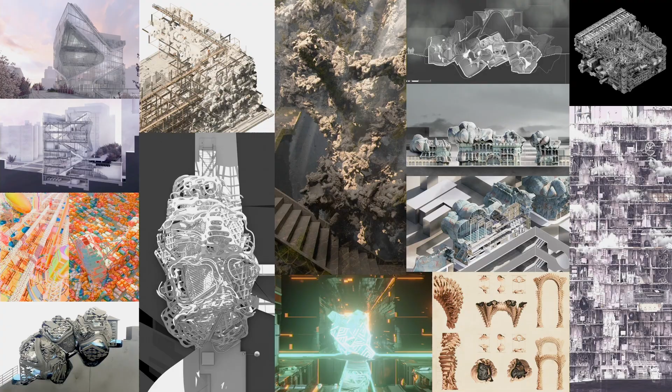We have always also worked in academia in parallel to practice, almost since day one, since we started working. We've done master's and bachelor programs at universities in the US and Europe.

In our own practice, which is maybe what we are going to expand on in the beginning of this lecture, we've been working since 2010 as architects and consultants, mostly on large-scale condos, malls, urban planning, property developments, and management of land, as well as a few occasional interiors. Beyond designing, much of this work is managing projects—you never really know where you'll end up in architecture, so to speak.

So let's return to bigness, and afterwards Hseng will take the second half to expand on craft and smallness.

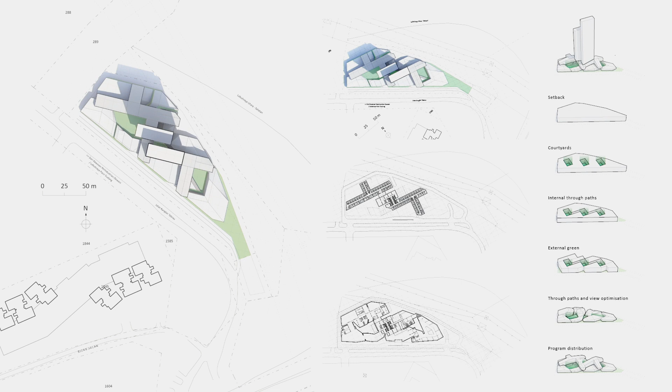Not knowing much about the neighboring projects to come, we based our first ideas on the local street fronts rather than the towers themselves.

So we wanted to propose a sort of city in a city, where the podium is deployed as an urban intensifier, incubating a culture of congestion where different functions and activities intersect and overlap.

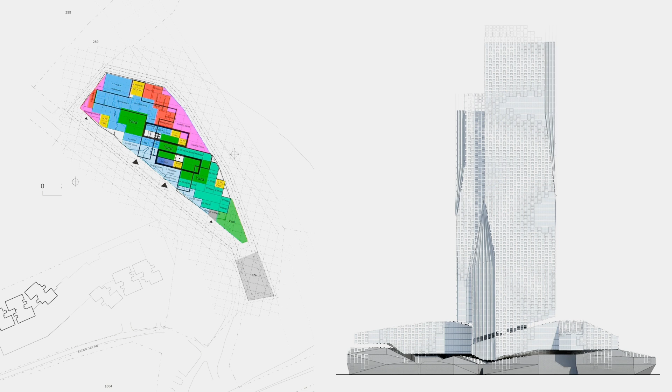It's a big and complex project, a total build-up of almost 90,000 square meters. It comprised over 400 hotel rooms, 400 residential units, almost 200 office units, 300 mall lots, plus community spaces and so on.

The ground and lower volume are mainly public, with commercial lots and restaurants, hotel functions, and apartment lobby, as well as back of house and centralized hotel kitchen and things like that.

The second tier volumes up are split between commercial, hotel, and residential, containing office spaces, hotel function rooms, apartment common spaces, gym, housekeeping, and things like that.

And the third volumes up are towers. The northernmost volume is mainly hotels, and the southern volume is apartment units.

The design volumetrically was made to offer views and spatial experiences locally and within, as an addition to the cityscape. The project was intended to play as sort of boulders, a play on this idea of erosion and spatial experience emulating geology and vastness, while smaller gaps, like cracks against the street, would function as local smaller experiences creating a more intense environment.

It was important that the project would appear as clusters of smaller scale massings, almost reading as separate volumes, to form streetscape, shops, restaurants, and cafes, literally creating a street front.

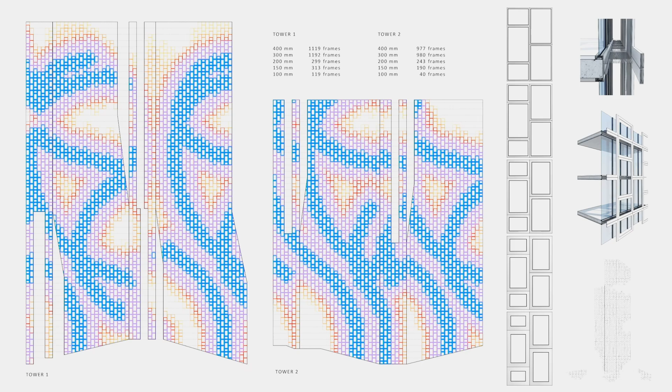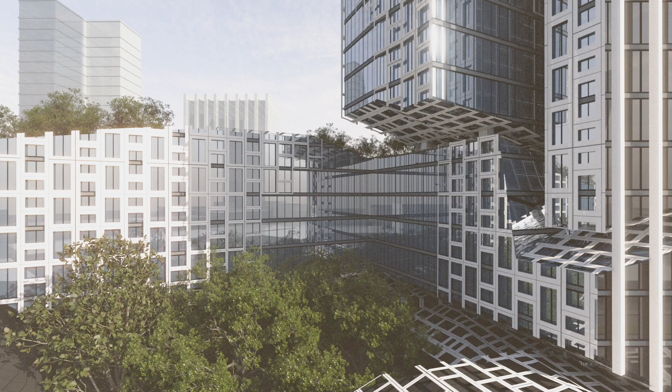The project was designed to offer access to the community and around the city, and it was intended to become a node that connected neighboring sites, a beacon in the area, a place to go and socialize for citizens and tenants. Much of the project was spent negotiating regulations, zoning, meeting program requirements, and a kind of fight with our own preferences and agendas for this particular project.

At the time, we were beginning to see changes in the market, and COVID hit. Families were looking for better and larger homes, and that became the agenda of pretty much every project overnight. This allowed us to focus more on livability and community rather than asset-driven developments, to our preference.

This is located west, just up the street from the previous project, up the hill overlooking the city. While it also is a very large project, about 60,000 square meters, it is slightly smaller than the previous one and more private in relation to the urban fabric.

The program here is much more reduced. Instead of overlapping and intersecting the different functions and activities within the building, here it was more important to emphasize domesticity and privacy. We also needed to propose kindergartens, clinics, shops for basic goods, and plenty of social tenants embedded in the typical commercial lots.

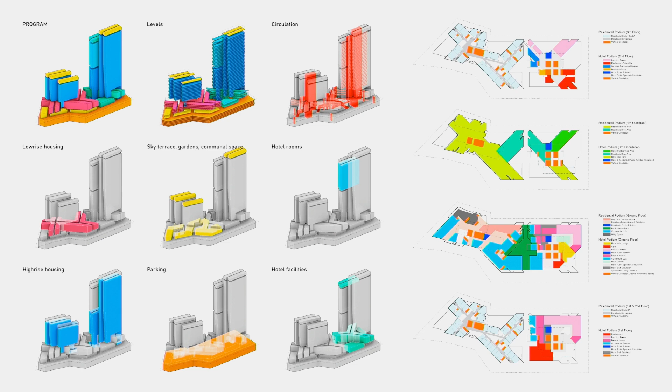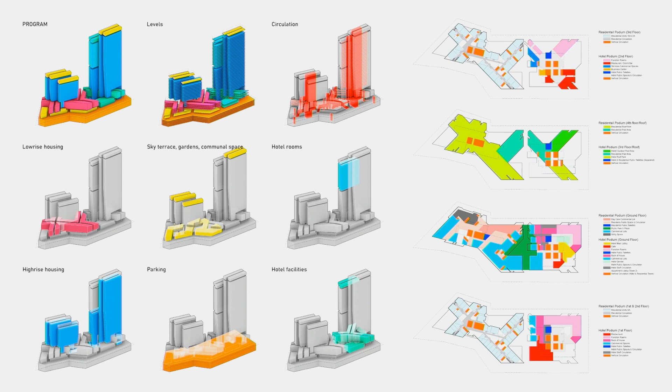So the project suddenly got more intertwined with society and needs. Our response was to completely separate the program from the apartments and the auxiliary programs. So although both private and semi-public programs seem to interlock volumetrically within the building, they are very much autonomous, with separate amenities, separate circulation, separate entrances, separate everything pretty much.

And the facade is composed of a double envelope: one outer wall with balconies and movable shaders to mitigate sun exposure to the apartments, and an inner glass wall allowing panoramic views across the city towards Singapore. This double envelope creates kind of an interstitial space between inside and outside.

Large all-around balconies with planters and space for plants. These interstitial spaces function both as gardens, we hoped, and as an outdoor interface, a sort of filter between the domestic space and the space of the city.

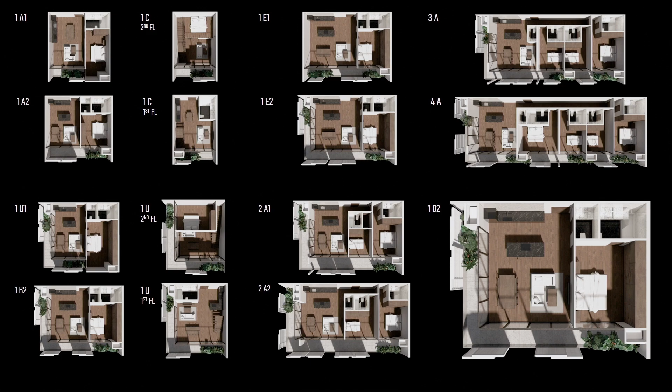This is a close-up of a bigger one, and you can kind of see the condition here. Most of the apartments were corner units as well, so we designed the development to have more of a corner condition. In some of the units, the balconies are really big, up to 22% of the total area, offering direct access out.

We promoted that to have this sort of buffer zone between outside and inside, and create a sense of privacy. So despite the large scale, we were suddenly designing homes for long-term tenants in mind, doing less catering to transient business-related crowds and investment.

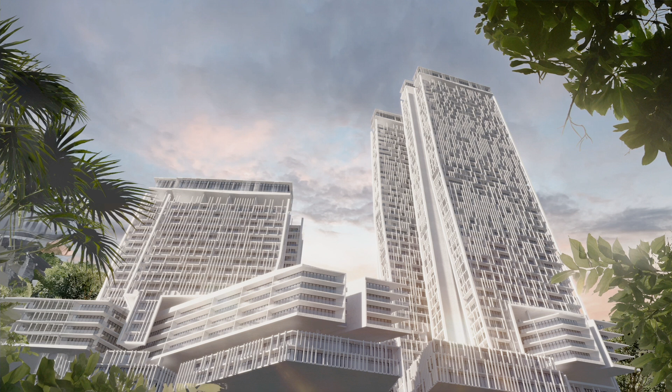And since then, discussions have been held on quality of living and life primarily, especially when it comes to housing. How can we emphasize domesticity and privacy in this large-scale context? How can this be a market for the tenants and for living, not only for investors, or at least some kind of equalness in that balance?

Do we have agency as architects to confront such market questions related to bigness? And this project is still ongoing. We're hoping to return to this later this year.

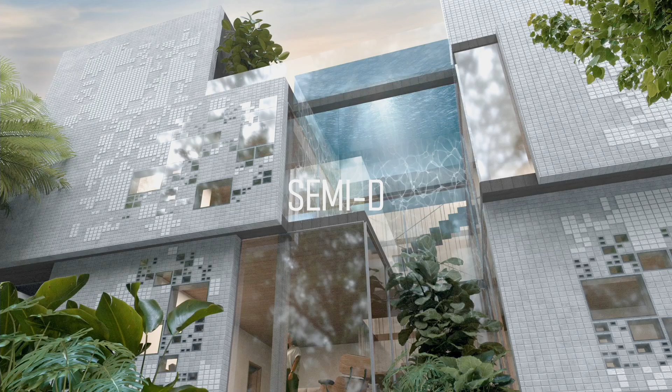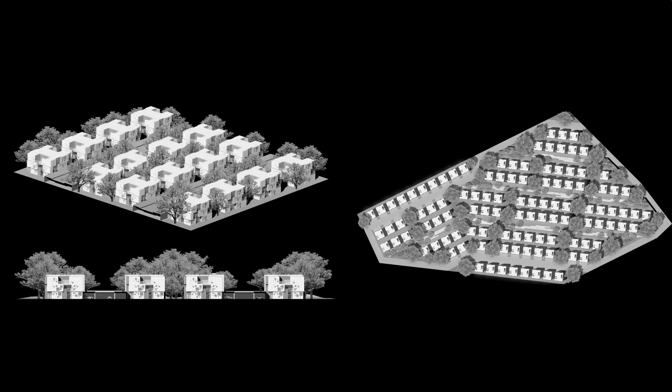Typically, semi-detached housing is to maximize land usage, with walled neighborhoods, planned as dense as possible, stacking these together in strict grids to waste as little as possible. This version had a few suspended driveways. We tried a few ways to create more public area within these variations.

Typically in JB, a development like these comes with a few different variations and sizes of houses. But we decided to take a chance and scrap the variations to afford more luxury and articulation in only one typology, so we needed to do fewer variations overall.

Essentially the design is made up of a series of stacked volumes that vary the design expression. And like typical semi-detached housing, the proposal can be divided into two, to host an extended family.

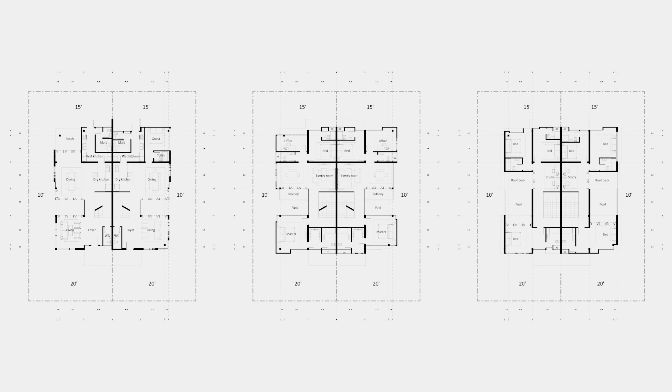There is a tight interplay between the built-up area and the lot size. This is exactly on the edge of what is allowed regulatorily. It is a maximum-sized house with a minimum-sized lot, you could argue.

The gates and walls around each lot were to be replaced by greenery, level changes, water barriers, and landscaping to create a feeling of a larger lot. And to create privacy as well as shading within the setting, the glazed areas are pushed in, into these central voids in the development.

To tie the materiality of the building to the area, we suggested that the facade would be clad with local limestone. Our design proposal for the facade is a series of precast and prefabricated wall elements that feature various small and large apertures, a kind of eroded porosity made from tiled grids and glazed openings.

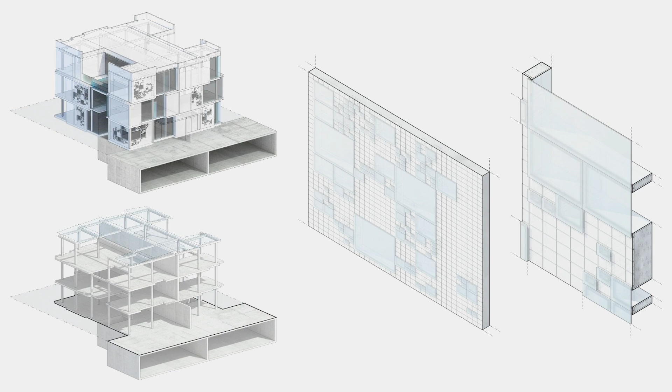Here's a limestone quarry in the area. We wanted some kind of cheap material that would develop this sort of pattern over time as a way to create diversity in the building.

We didn't want to propose a typical semi-detached house, clearly, this sort of mass-produced housing where we do a few variations and just catalog different materials. So instead of designing 3-4 variant typologies, we increased repetition instead.

We also increased formal expression, as an alternative to space planning, to argue for and allow more atypical material, more expression, more luxury amenities. We introduced a floating pool and patios and things like that, which you normally don't see.

This project is, we argue, examining the bigness of vast repetition, suburbia if you will, and tries to maintain quality material and architectural expression in various ways. The last project in this first series is an urban master plan called Bandar Seri Alam.

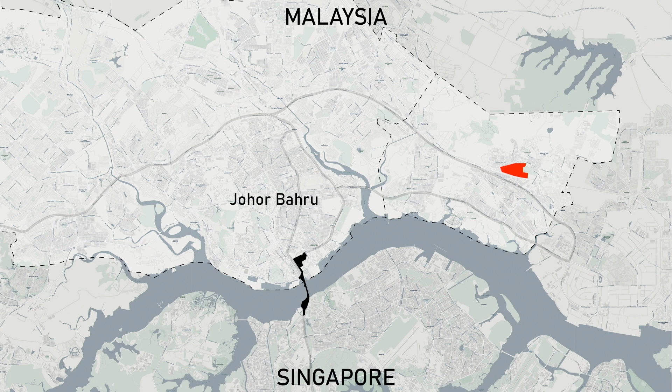This project is a redevelopment we did from a golf course located on the east side of Johor Bahru. This took a few years to get the land titling and subdivision of the lots for this golf course approved. It's a 18-hole golf course squashed into this land with a sort of hill, and whatever remaining structures on the land had to go, or are being torn down as we speak.

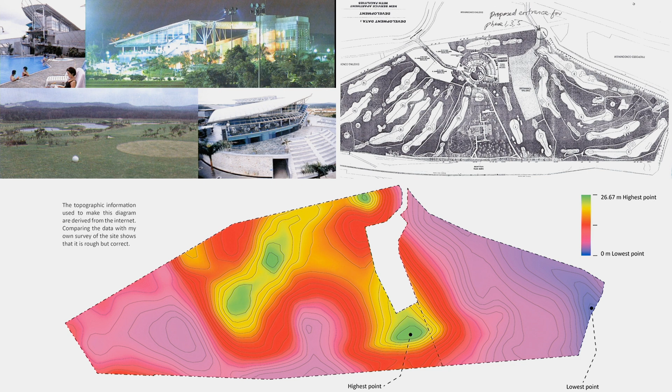The hill had a clubhouse on top in a sort of cool high-tech Pomo style. What would you say, a clubhouse and entertainment complex, designed by a Japanese architect sometime in the early 90s. It was kind of destroyed by botched extensions all over it, and it was decided it had to go for much higher planning value.

In 2021, we finally got the green light to do a full proposal across the west portion of the site. This portion is about 113 acres in total.

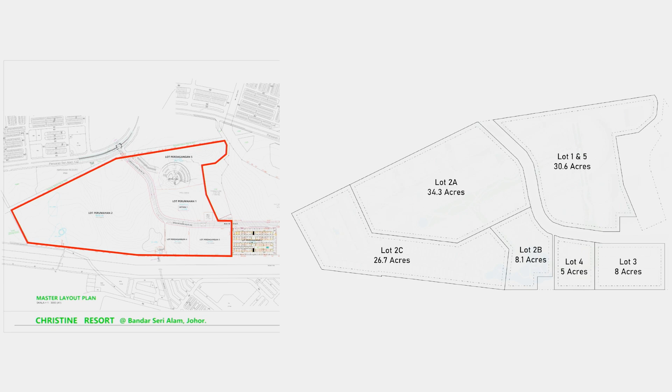The first thing that was planned on the site, with the authorities, was this access route you can see that crossed from one side of Johor Bahru to the other, followed by these vast subdivisions of zoning and land titling.

Here's our current proposal. The site is its own township, with each land parcel connected by parks, green corridors, skywalks, and two parallel avenues on each side. The main goal is to make a walkable, greener and cooler city.

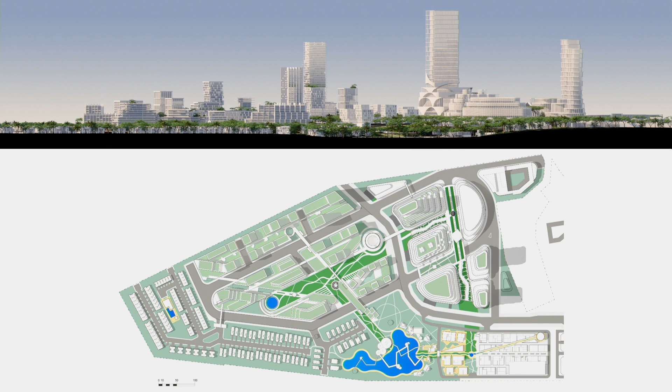Some of the roads beyond the main arteries are extended to the lot edge to connect neighboring developments. And the project is humongous, at least to us.

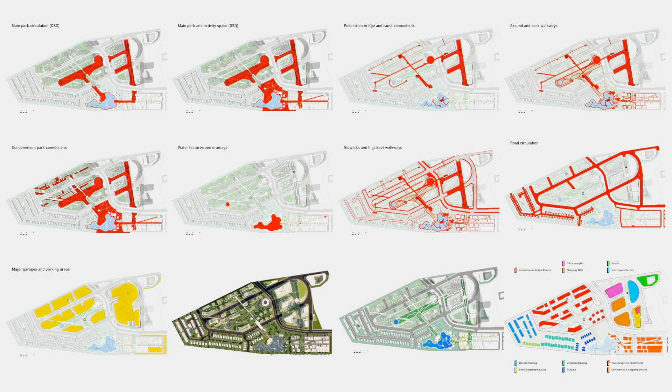And this is all within this park-like setting. It took us a while to settle the approval process for different heights, how we could take a little from one site and put it on another in terms of build-up area to create variations in the zoning. In the end, every possible ministry and state department was involved in this project, and it was a lot of meetings to get anything running.

Here's a view over the central pond, across one of the main park stretches, through the commercial and office building higher up to the northeast. Some of these ponds are there not only for aesthetic reasons, they're obviously retention ponds and reservoirs as well.

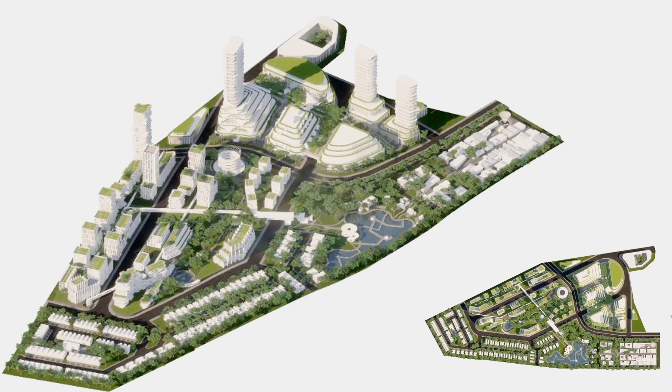The city features linked bridges so that tenants, professionals and visitors can cross over from park to park on foot, enjoying views across the neighborhood.

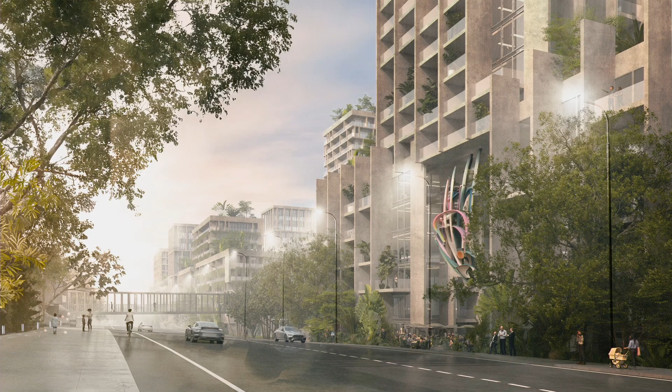The main street circulating the northwest side features a more compact street front and more urban activities. Here's a view over one of the avenues with large sidewalks and urban street-side architecture.

Here's a view over the central park node at the threshold between the more domestic park landscape and the urban zoning here, perhaps you could call it.

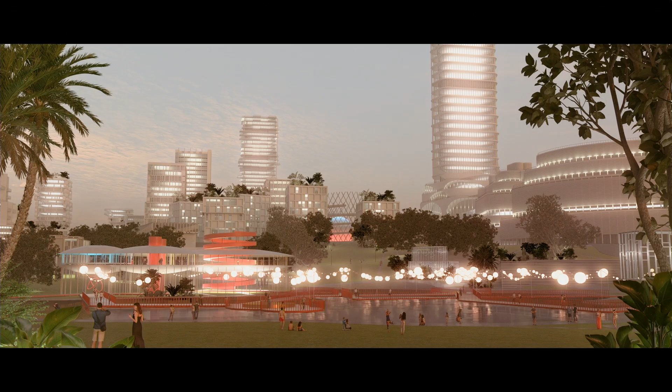In contrast to the street side, the architecture within and around the parks forms private pockets and variations in the landscape. Here's a view across the reservoir that will also serve as a feature in the park, in the lower end of the site, containing pavilions and function areas.

And here's a view across the commercial, more urban zone with offices, leisure, culture and social functions, and a school somewhere in the back. So this project is undergoing development at the moment, and there's various bids going. And this is an attempt for us to create a pedestrian city where people could move through green areas undisturbed

by traffic, promoting health and outdoor activities at the doorstep of housing and offices and so on. And a few questions we're still asking are: how can planning at this magnitude inspire the local and the small? How can texture, materiality, craft, and ornament be considered within contemporary urban planning? And what model of urban development does it take to inspire new modes of designing?

So these four projects are all within the Greater JB, as I mentioned earlier, and all urban projects around here, sort of, you would say, creating a new city, are all through the concept of bigness. And with that, I will hand the mic over to Hseng.

All right, thank you Stefan. So as we can see through our practice, we have experienced firsthand the kind of intricate relationship between bigness and asset urbanism. We have seen how neoliberal mechanisms such as capital flows, financial deregulation, market speculation, and the proliferation of real estate investment trusts shape the commodification of urban spaces.

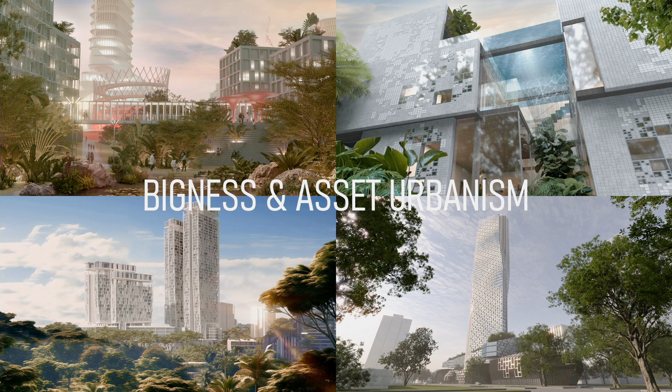And in terms of architecture, one could argue that the aesthetics of this evolution has been shaped by two interrelated trends. Firstly, there's a homogenizing tendency of modernism, whose systems we're still using today. Secondly, the globalization and standardization of architectural practice. And so the problem with bigness is its reliance on mass-produced, standardized parts, and the alienating scale and use of placeless materials that disconnects the built environment from local context.

And so we're also seeing that currently complex global production and supply chains are only reinforcing this paradigm. And CAD blocks and BIM systems, they also have this tendency to standardize design processes more than the global industrial supply chain already does. And so they reinforce generic architectural tropes and design languages, resulting in buildings that are completely detached from a local sense of place.

And the homogenizing tendencies of the modernist lineage of architecture is further effectuated by its inclination to strip buildings of iconography, ornament, and all the cultural symbolism that comes with it, and the sensory experience that comes with it as well.

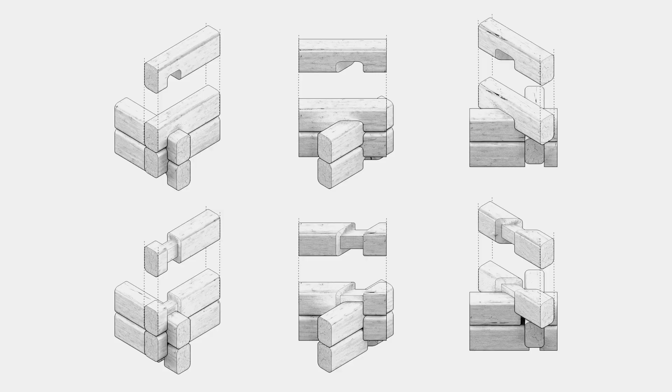What we have here are repeatable, standardized elements and joinery that can be assembled through multiple configurations. This was achieved through bottom-up algorithms that control a series of inputs, including the number of module lengths, the number of joint angles, which ultimately affects how many different pieces need to be manufactured, and the desired final volumes, which affects the scale and overall massing.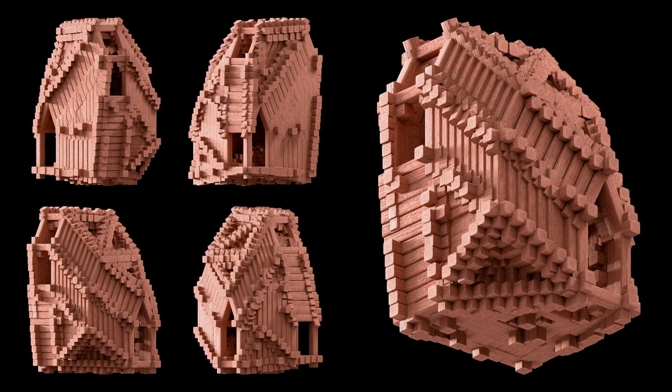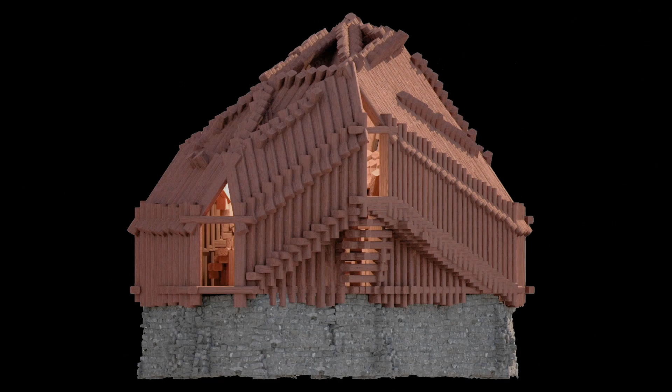Inputting different starting seeds can result in different outcomes, and by changing the volumetric variable, it can also be deployed across multiple scales. We also started to explore how it could be inserted or connected to other systems, such as this stone plinth, also typical of the Swedish barn typology. It could be attached to an existing structure, or the proposed system could act as an extension.

While the development of this systems-based approach is quite important for our process, so is representation. We see representation as a design tool in itself, a means through which we can evaluate our design outcomes. By putting the architectural artifact back into its vernacular context, we can really start to see how it relates to site and expands and contracts historical time through the ambiguity in the reading.

What might appear to be a strange artifact of the past also presents an uncanny present. Is it very old? Is it very new? It's not immediately clear. These bothies are supposed to displace the onlooker in time, and we are simultaneously caught between a retrospective past and a mysterious future.

So interestingly, what started off as a thought experiment slowly developed into conversations with regional actors in Idre. The area is known primarily as a skiing destination, but is gaining popularity as a summer destination as well. The region is home to forests, marshlands, and highlands that have varying degrees of extreme remoteness.

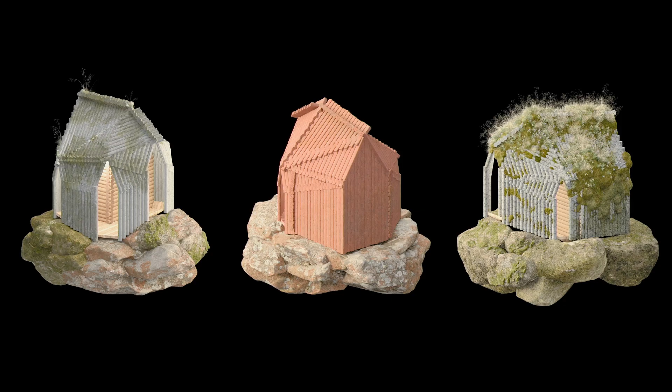So drawing from these sources, we proposed a series of bothies with varying expressions based on their site context and levels of remoteness. Some are designed for marshlands, some are for highlands, which consist of fells and grasslands, and some are for more forested regions.

The idea is that ones in less remote areas would be designed to stand out, whereas ones in more remote areas are designed to be withdrawn.

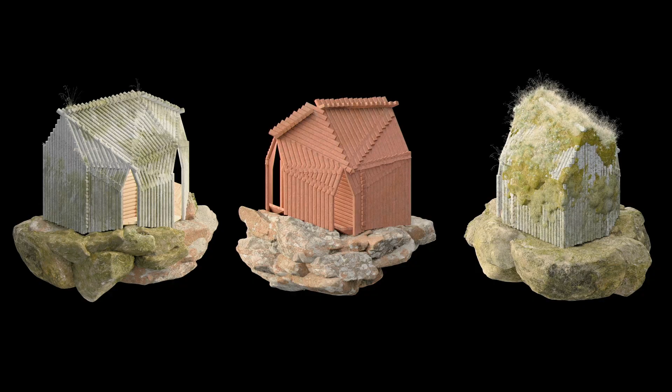Okay, so in the previous project, we looked at vernacular materials in terms of assembly. This next one here is another take on the rereading of cultural context and the problem of the fake. This time we're looking at data sampling of historical architectural artifacts.

So this is called Kitsch Edifice. It was a thought experiment back from 2016, and it emerged as a reaction to some of the developer work we were doing at the time.

So in one meeting, I think we were actually asked if we could design, what was it? It was a mall, right? Venice. A Venice mall? Okay, a mall in the style of Venice. Anyway, so this thought experiment was a kind of reaction to that.

It's a kind of speculative urban tectonic. Through the employment of iterative photographic scanning, as well as the processing of that data and the imagery from it, we used that as an alternative means of generating geometry. The idea is that this particular project breaks away from direct computational, Euclidean modeling logic.

So a lot of the resulting design is actually an effect of the manipulation of material behavior and of the data, rather than an effect of modeling. The idea was that it would be 3D printed in the form of a Victorian urban block, and it would be a play on the sort of mock architectural styles popularized by uncultivated taste.

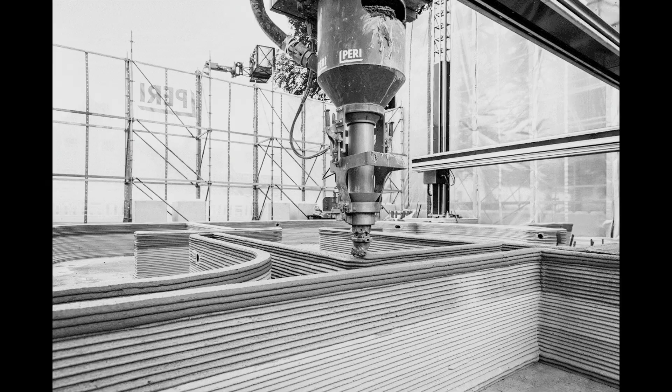And we thought, as part of the thought experiment, as building technologies evolve, new forms of architectural imitation could emerge. So this project juxtaposes this kitsch Las Vegas copy design style against a disfigured Frankenstein's monster of itself. The project navigates between physical and digital through the deployment of techniques that intervene in the data sampling process.

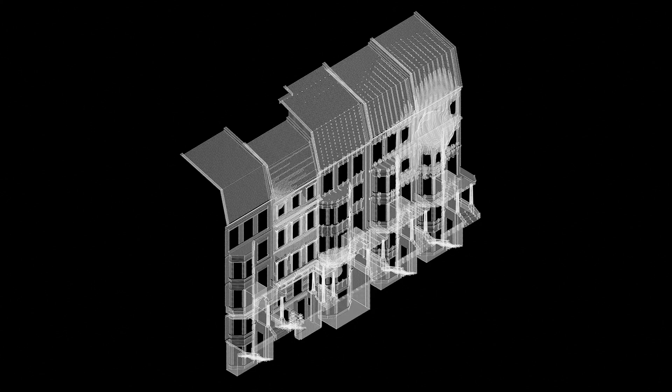So we're concerned with reconstruction, but we're not concerned with the exact copy. Here, the 3D scan is purposely incomplete, and the resulting point cloud surface reconstruction is purposely badly interpolated in these incomplete zones.

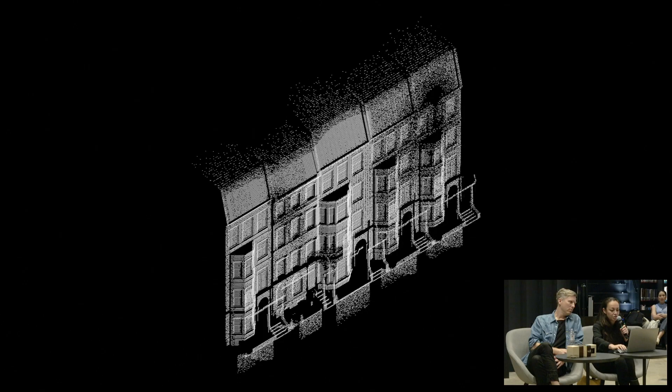Using a combination of these geometric distortions and toolpath manipulations, the resulting geometry is further deviated and contorted through changes in speed and excess material extrusion. So in place of direct translations and high fidelity copies, the project embraces the digital and material entropy that occurs when data gets transferred from one medium to another.

It exploits the discrepancies and gaps in the sampling and material processes. The project adopts the noisy, the incomplete, the dirty and the imperfect in the application of techniques and aesthetics. The gloopy quality of bad scanning, bad mesh interpolation, and bad printing becomes more desirable than their anatomically correct counterparts.

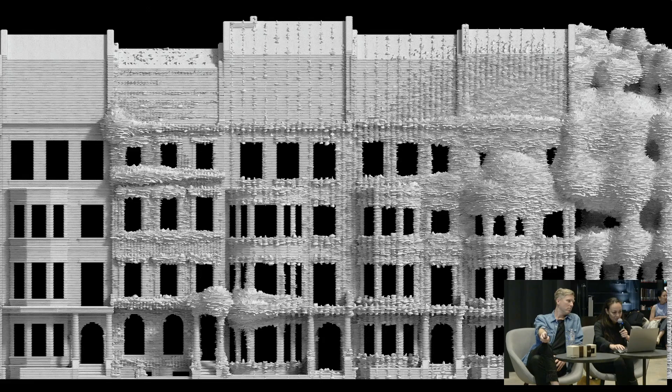This creates an ambiguity in the reading of the architecture. It no longer exists only as a copy, but takes on an aesthetic of its own that is familiar yet uncanny, a kind of estranged reading of the typical Victorian block. Archaic architectural elements such as keystones and cornerstones undergo multiple translations, estranging and disconnecting local figures and features from their original purpose.

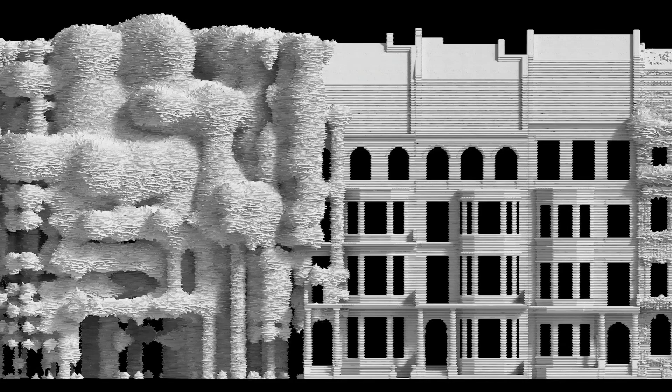What was once a structural element became a kind of fake cladding detail, which you find in Las Vegas, where the keystones and cornerstones are merely masks that symbolize structure but aren't actually structure. Here, they're just a mere gesture articulated by toolpaths.

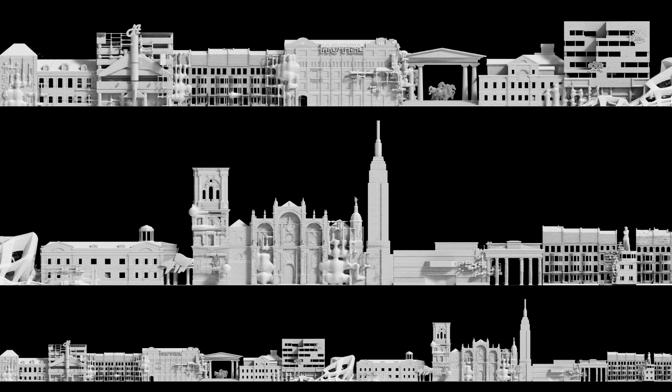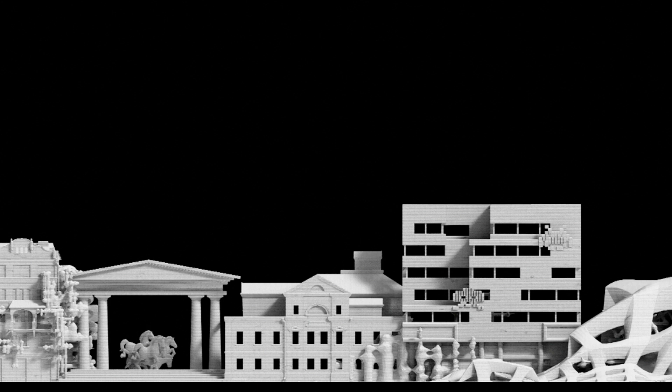Here we start to explore what happens when the system gets deployed at an urban scale. This is a kind of city of architectural ghosts. The facade becomes merely a type of mask and a series of echoes and apparitions from other places and other epochs, superimposed and juxtaposed on and against one another.

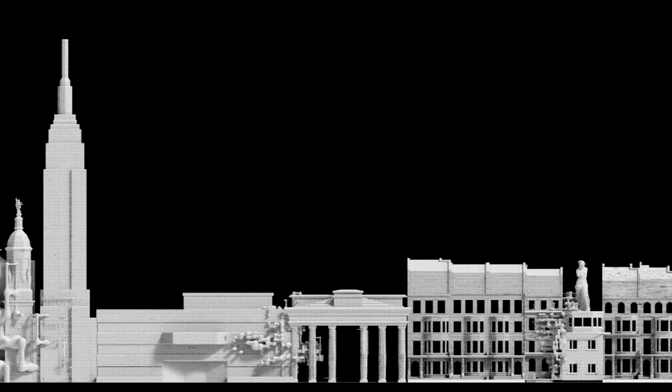Here we start to explore a different take on 3D printing, this time as a kind of digital stucco or surface ornamentation. This project has currently been done in collaboration with Chalmers and the robot lab there, using the cellulose wood pulp 3D printer at the school. The project borrows from the tradition of stucco plaster reliefs from classical architecture, Baroque and Rococo.

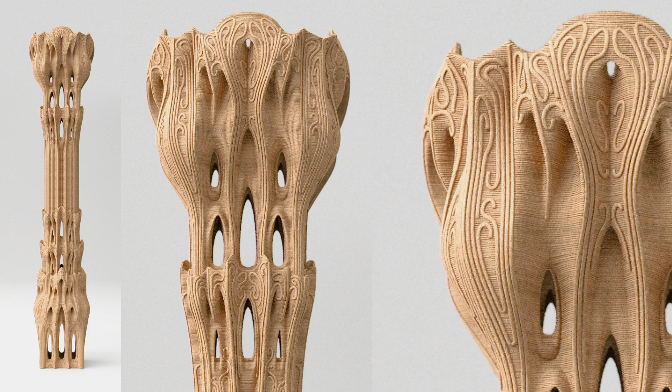Here, the regular, stratified, striated, typical 3D printing lines undergo a second layer printing that is purely superficial. This is work in progress, so we're still working on some calibration, but the idea is to print on top of a print.

What that double print ornamental layer starts to do is break the perceptual reading of the typical toolpath stratifications, which is one of the major tropes of 3D printing.

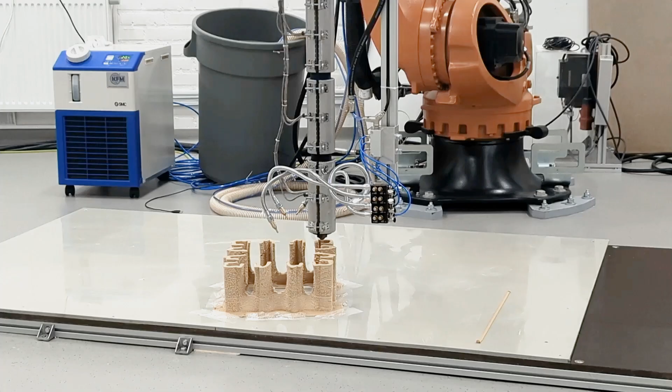When working with non-desktop 3D printers, it's important to keep in mind that printing supports creates large amounts of waste. I'm going to get quite technical in some of these projects, I think it's necessary. But basically, the column's base geometry was designed so that no support material would be needed for printing at all, meaning no overhangs over 40 degrees.

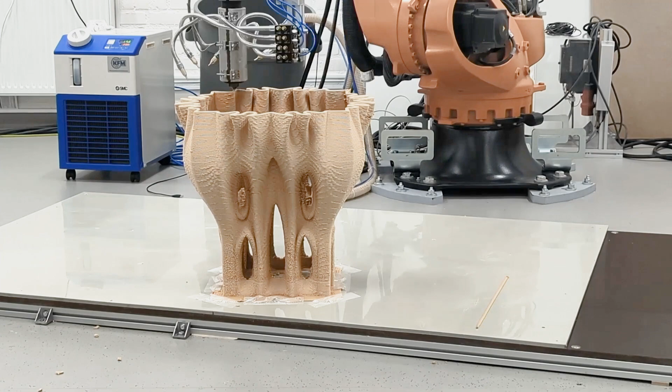Here, the apertures of the columns all meet in this sort of Gothic style arch. You'll see the pointed top there, and this is to accommodate the parameters of printing without supports. So you wouldn't be able to have a more arched Roman column, for example, because that would completely collapse.

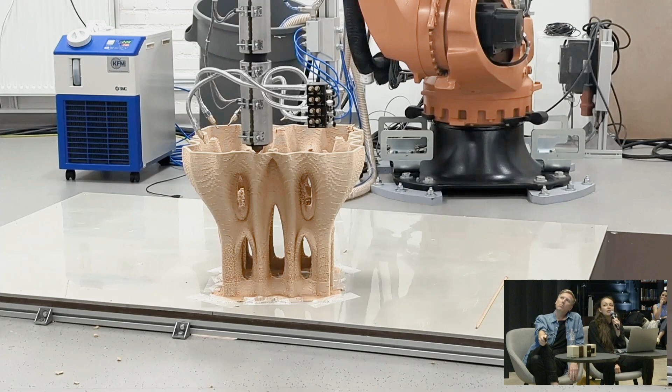We also had to work with calibrating many elements of the extruder itself. Things that you normally take for granted with a desktop printer had to be designed into the printing algorithm for the robot. This includes the speed of the robot arm and the feed rate of the extruder, based on the turning screw head. We also had to stop and start the extruder, but it was a little more involved than that.

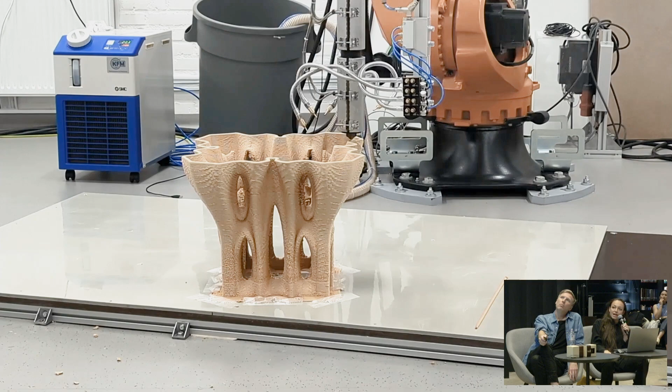The extruder, because the material is so sticky, there was so much pressure in the extruder itself, so material was constantly being pushed out even when the extruder wasn't on. This meant we had to introduce and calibrate a kind of retraction. Every time we would print a path and stop, we had to get the printer to suck the material back up into itself, between the extrusion paths.

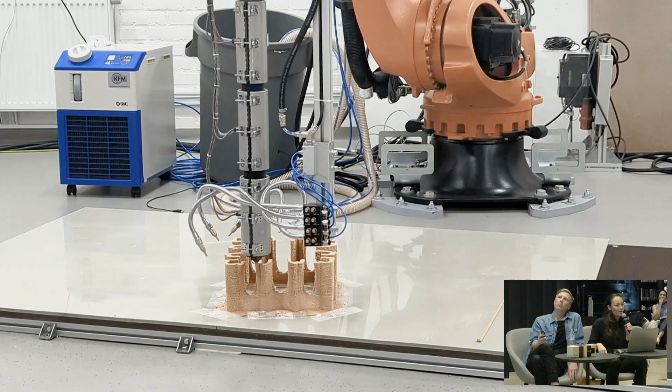Because the material is also so sticky and really fibrous, we also had to add this— you can't see it now because it's so fast— but we had to introduce a sort of flicking motion with the robot, so it would tear the top off.

At the same time, it would retract and do this flicking motion. This wouldn't have been necessary with a material like PLA, but because we're working with this super sticky material at quite a wide thickness, there was a lot of headache around that. But I think we could probably calibrate it further.

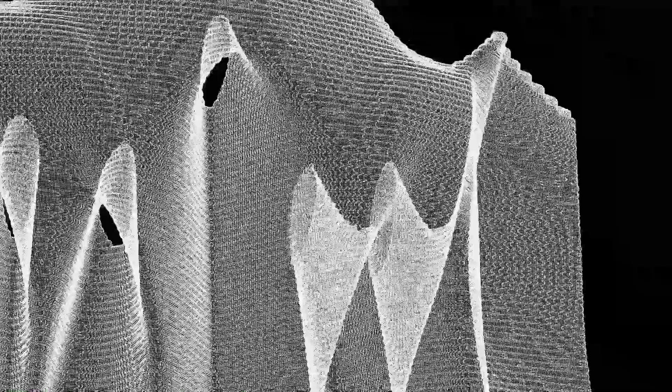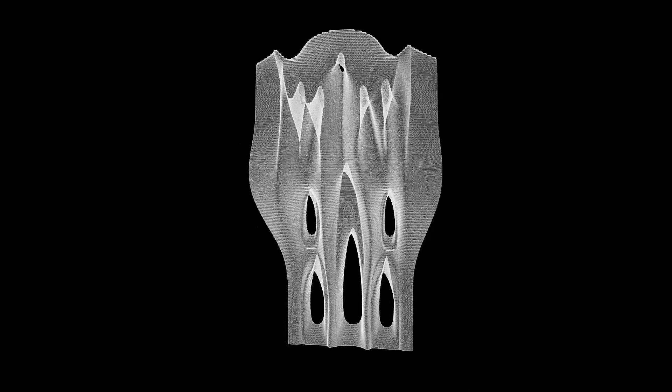To achieve the overprint of the digital stucco, we first had to 3D scan the print, because of the slight discrepancies between the digital geometry and the physical output. Like most plastic 3D printers, the material tends to warp slightly as it cools. But this material, because it was made of wood, actually absorbs moisture from the air, and tends to swell and contract depending on humidity, just like real wood. So we had to 3D scan it just before projecting the toolpath and printing, and had to do it on the spot each time.

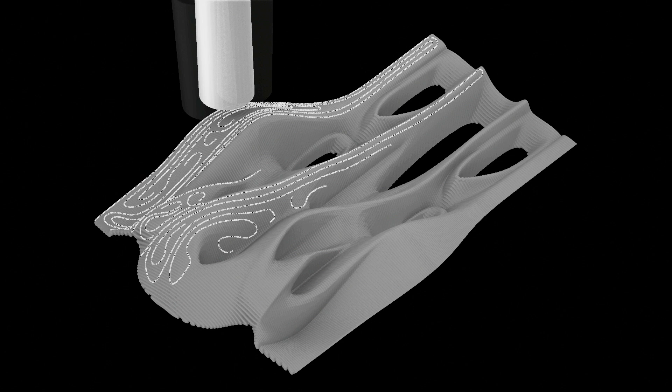Because of the topology of the surface, the extruder had to be as close to the normal of the surface as possible, or perpendicular to it. Some surfaces were too steep for that angle of approach, so it was quite awkward for the robot arm in some positions. We had to compensate by tweening the approach between the normal of the surface and the Z direction of the robot.

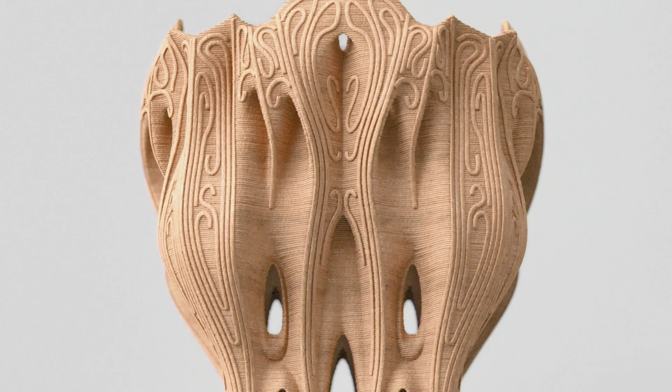To minimize potential errors and reprinting of large sections, the column itself was designed as a series of five interlocking pieces that are friction fit together. As mentioned earlier, this material has a tendency to warp and shrink slightly over time, so this interlocking friction fit was a way for us to negate any issues with tolerance that might emerge from the material.

In this next project, we started to ask: what if we took this one step further and only printed the ornamental toolpath without the base geometry? Here, the ornament itself could be structural and performative, and the toolpath could become a type of ornament.

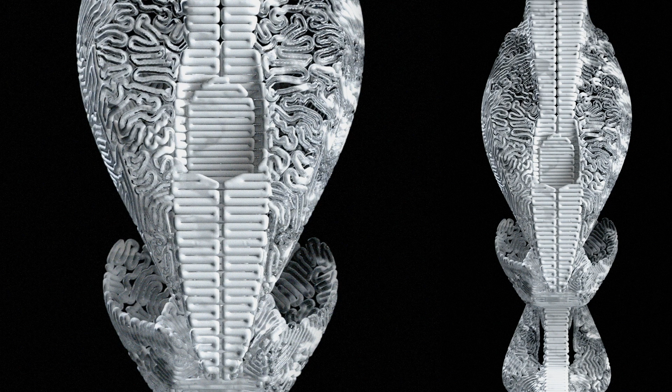Here we 3D printed 8mm PLA on a 3D CNC milled surface topology. The toolpath design in this case had to have enough density to cover the entire surface, and joints between the surfaces needed to be designed to overlap and interlock. So the seam between parts becomes part of the surface articulation as well as a structural reinforcement.

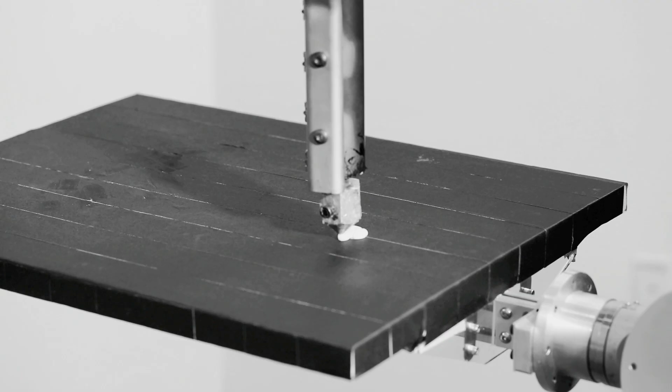Unfortunately, we have a video of the first test print. This was an early print, so we were still calibrating, just printing on a flat bed. Okay, I think we get the point.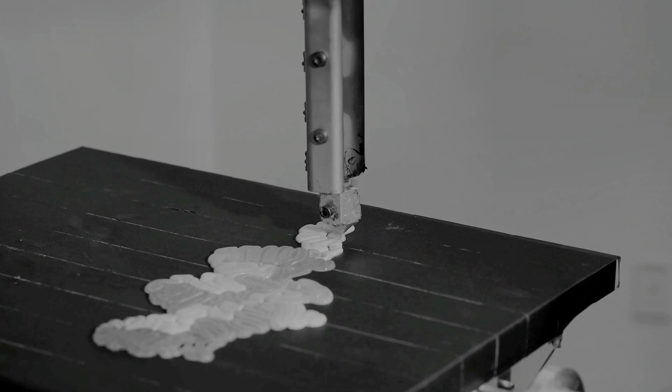This is also work in progress, this time working with ceramic. One thing we'd like to try with the robot is using it to paint different ceramic glazes on different areas of the surface, which we haven't tried yet. It would be nice to get that on the apertures of the geometry, so openings could be highlighted. Anyway, this is just thrown in there—it's very much work in progress and has yet to be continued.

Now we're going to move from our own personal research into some teaching projects as we conclude our lecture. This is from a master course at Chalmers University of Technology from 2019.

The project was a design-build studio, a collaboration between Chalmers University and various industry partners. One was RISE, the Research Institutes of Sweden, who were developing a wood pulp cellulose printer at the time. This project actually predates the column, and a lot of what we did here ended up being used in it.

Another collaborator was Stora Enso, who were developing wood pellets for the printer—this wood cellulose material made from wood pulp, a byproduct of the Swedish lumber industry. One of the other large partners was Vinnova, the Swedish Agency for Innovation Systems, who provided some of the funding for this project.

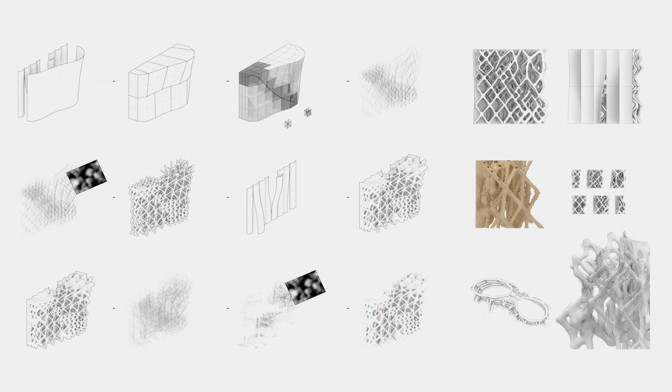The toolpath deviation is determined by an image sampler, so nothing too complex there. Some of these deviations actually extend 40 or 50 millimeters beyond the geometry, so it starts to look like hair in some places. The final design outcome was the result of a series of calibration tests done together with the RISE team and their printer, where we explored the limits of depositing speed, toolpath deviations, and overhangs.

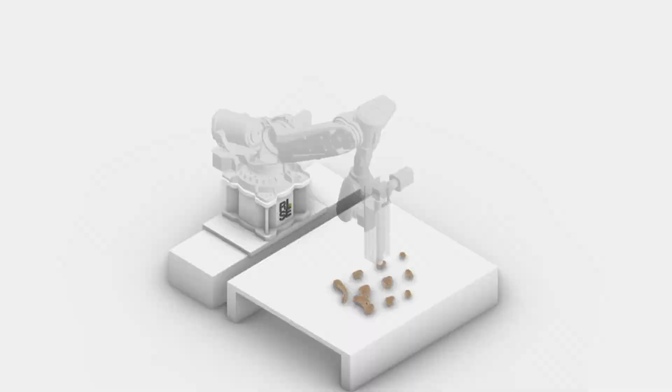At this moment in time, Chalmers didn't actually have their own printer yet, so the 3D printing was carried out at RISE. All the elements that were calibrated for the Rococo project were designed here first.

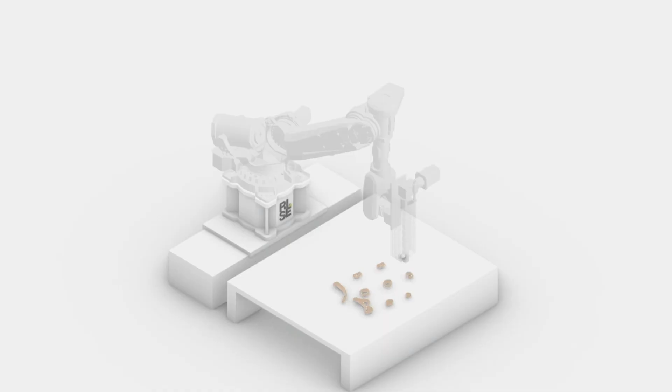Initially, the cellulose 3D printing at RISE could only print continuous toolpaths. So this whole idea of retracting the material, adding the flicking, in all those calibration tests we did — this was something we actually helped consult RISE on with their robot extruder. Later on, Chalmers bought this extruder from RISE, and the reason we got funding to do the other column project was so we could calibrate the robot setup for Chalmers.

In the case of RISE, we actually had to output G-code directly from Grasshopper to the robot, because ABB was also involved. I think they wanted to develop their own algorithm or software for large format 3D printing using G-code, so you could just input G-code and it would print directly.

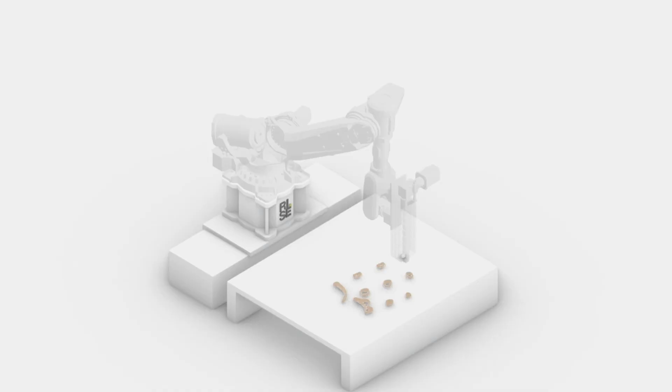Another exploration in robotics was carried out in a recent-ish vertical studio we taught at Rensselaer Polytechnic Institute in the US, with third, fourth, and fifth year students. Here we worked with architectural sampling and robotic sculpting in massive materials.

I think in architecture, mass is this increasingly elusive condition. Mass usually evokes associations to much more archaic forms of architecture that have other, much more old-school modes of production — the monolithic rock-cut architecture of Nabatean mausoleums, or Indian cave temples, or the hypostyles of Egyptian halls, or the stereotomy of medieval cathedrals.

By contrast, contemporary architecture is more often conceived as surfaces. The prevalence of sheet material and use of digital software results in architectural tectonics determined by offsets and layers rather than by excavation and stereotomy. Indeed, the geometry of digital space is itself described through the infinitely thin coordinate systems of Euclidean and topological space. So in this studio, we revisited the notion of mass through the interrogation of computational tools for design and production and their interface with contemporary massive materials.

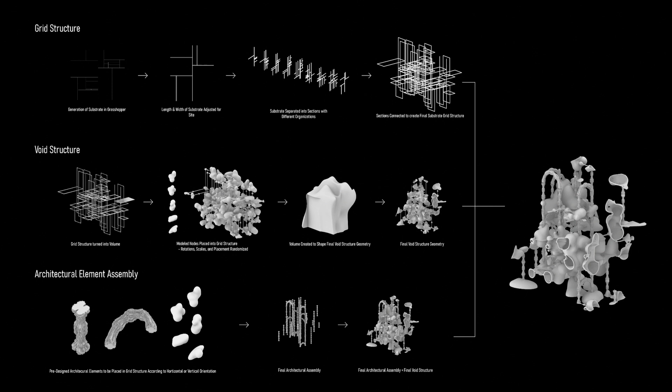Here's one example at the larger scale, in an urban infill lot. The system is comprised of an aggregation of one column element, one arch element, and so on. You can see this more clearly in these diagrams—it's a bit studenty, obviously student work. Here you can see the underlying structure and layout composition, and the elements are aggregated into configurations depending on certain site and programmatic conditions.

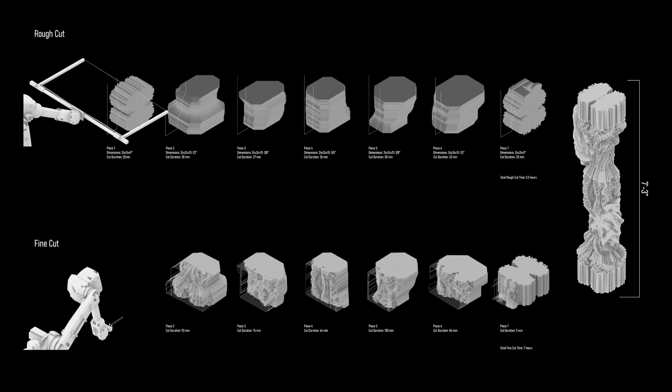The detail element was conceived as a series of blocks stacked using stereotomy. The robot created two levels of cutting for different resolutions: wire cutting for the rough cut and a heated scoop for the fine cut. Unlike traditional CNC milling, this resulted in a product that could be reproduced much faster.

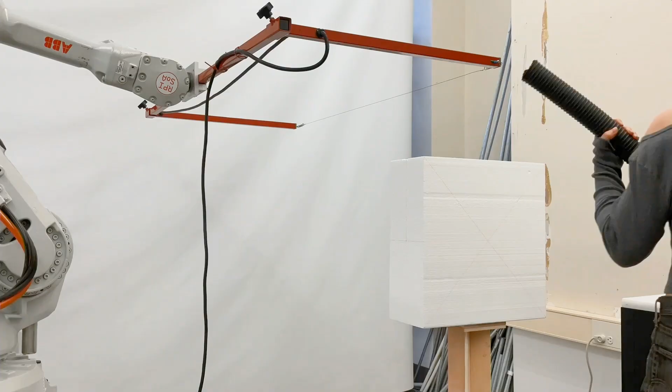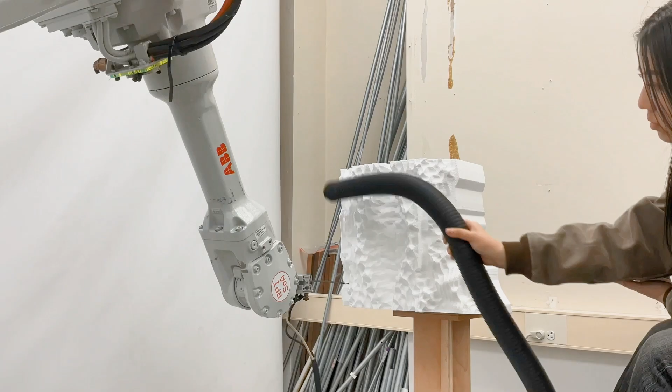Here we see the wire cutting of a rough silhouette—again, very studenty, unpolished, but this is an extremely efficient method for cutting that could be used on stone if you use an abrasive wire instead of a heated one. Each piece took 30 minutes for the rough cut, and then a bit longer for the second round. Because we're using a heated tool rather than a mill, it could be done much faster.

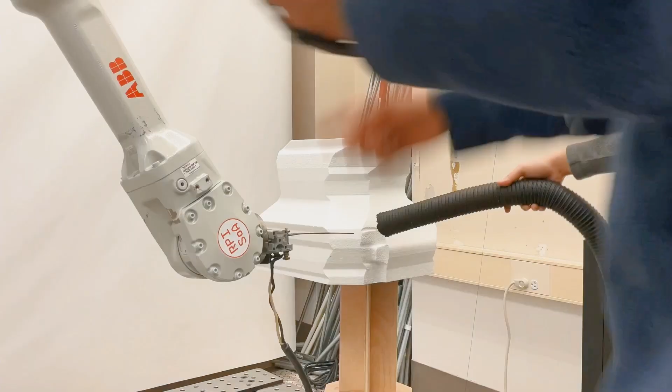Here's a project from another group in the same studio. This time they were sampling Corinthian columns.

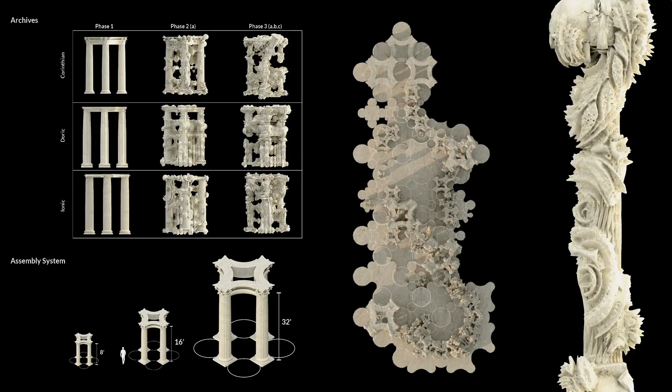Right, so here they were looking at overlapping Truchet patterns so that at different scales they would interconnect and loop together. On one hand we had the system for aggregation, and on the other hand the sort of small local articulation. Again, I think the inscription of the machine path in this project, like many of the others, is more desirable than the fidelity of the geometry.

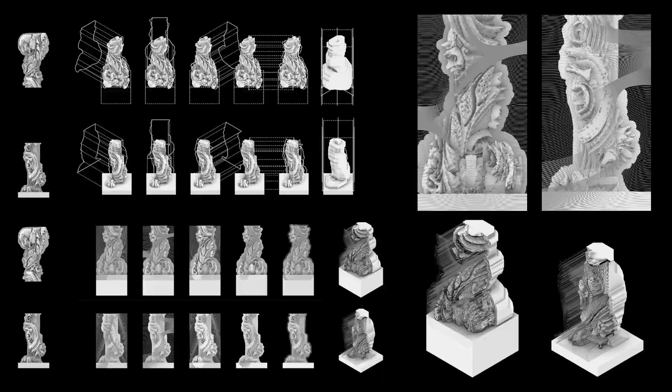The idea was to design machine-readable architecture surfaces that could act as trackers for augmented reality. It's an exploration of a kind of cyborg architecture, where a digital veneer is superimposed onto the physical architecture.